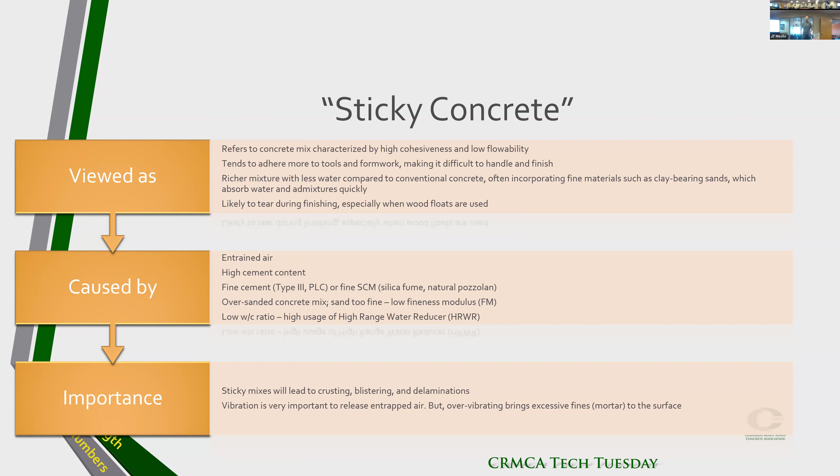Also some of the admixtures you use, I mean I've seen high ranges, if you're using high ranges it'll make it stickier. Especially moving into the 1L world, we're seeing more high range used to get those higher slump mixes, even into SCC mixes. We're seeing these amounts get to the point where it's causing more stickiness. Honestly, I think we had to use AI to give us a better definition of what is sticky concrete. Essentially you're creating more surface area, and more surface area gives you that stickiness. So those water reducers are being used at such high ranges compared to what we're used to, we're gonna start to see more of that with the 1Ls and things like that. So bear that in mind.

I just want to touch on this one too, it's also caused if we have a mix that is high in air, that'll cause that stickiness as well. So if you guys are using a mix regularly and you're like, hey, why is it sticky today?

Hey, can you guys pop an air test on this back at the plant? I think there's something going on, talk to the producers. Because that is very much something that could be happening.

Is it the admixture that's making it sticky? It's not the voids. It's actually quite the opposite - there's more surface area being used, so there's less voids. Without water reducers, you have more connectivity between your trowel and the concrete, so there's more stickiness, more of that mortar.

But how does the high air make it sticky? Is it the admixture for the air? It's not the voids, it's created by the air. It's literally just the percentage of air that's in there is going to end up causing more cohesiveness to your trowel.

It's like foam on top of a beer. Yeah, okay. When you're taking a drink of your beer, you have all that foam stick to your lip - it's going to be the same kind of thing.

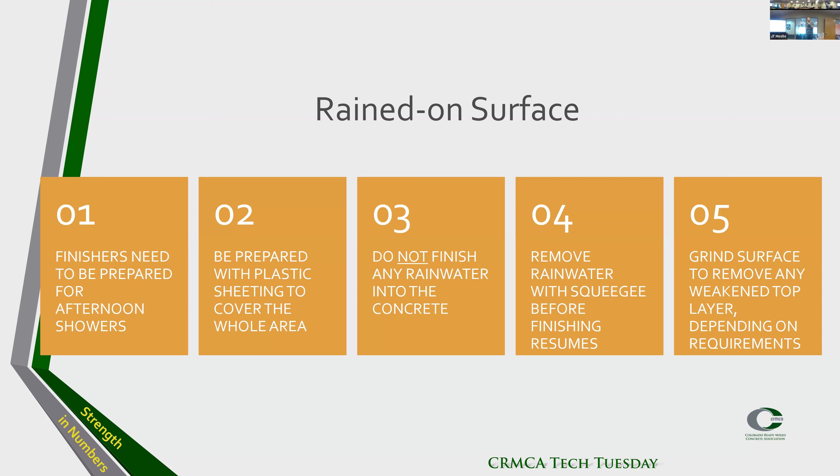Absolutely, the last step. But exposed aggregate would look nice. Yeah, and I'll tell you guys, I've actually seen some homeowners end up with that kind of situation where they have to grind down the top surface, and it gives it kind of a cool look. So just personal experience.

Oh, this is all you. Is it? Oh yeah, you wanted this. Let me see, double check. Well,

We'll talk about random cracking. Plastic shrinkage cracking is one of the big ones I see a lot, especially with the 1L — it's very prone to plastic shrinkage. One of the things I always tell my contractors is to watch the spacing for your joints. Sometimes they do joints weirdly, sometimes they do designs, and it creates these weak spots, and it creates random cracking. Sometimes it could be the surface, the subgrade — there are multiple variables when it comes down to random cracking.

Overloading the slab with heavy equipment also causes issues, especially if it's still early on and not ready for production — 2 or 3 days, if you don't have a high early mix, and you're driving your semis and putting all that equipment in, that would also create random cracks. But it's not so random, because you drove a big semi.

One of the points we talked about while doing this was, everybody talks about all the different kinds of cracks — plastic shrinkage, craze, all these different things — but one of the points JT made was there's really only two types of cracks: plastic shrinkage and random, that's really all there is. So that's just something to bear in mind — all of it is just an umbrella term, a way of saying cracking. It's gonna be random, because if we don't tell the concrete how to crack, where to crack, when to crack, it's gonna tell us where, when, and how it's gonna crack. So it just becomes random at that point — I thought that was a cool point.

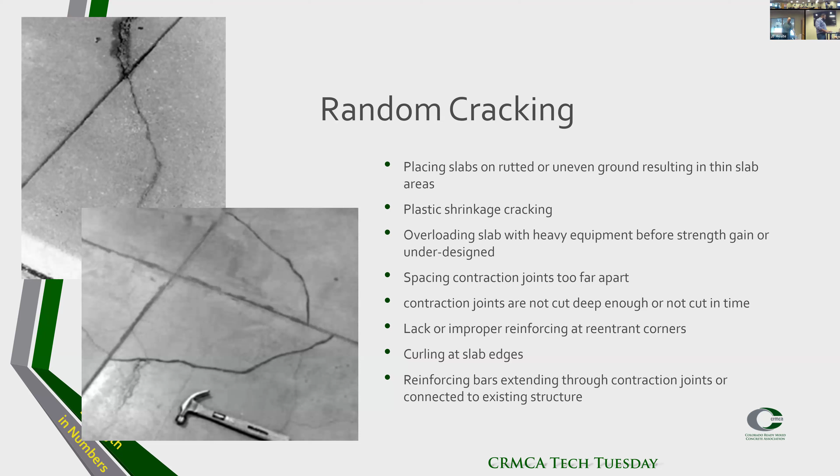Even your curling — when it curls, you've seen it with different temperatures, top versus bottom, and the slabs start to curl. We've seen that in warehouses where it even creates hazards. You're driving a forklift, imagine a slab curled up about this much high — you hit those forks, you're gonna do some damage. So once again, the spacing in between those slabs, the joints, is gonna make a big difference when it comes to that.

Joint spacing is 24 to 36 times the slab thickness, and the proper saw cut depth is 1/4 of the slab thickness. One thing I was unaware of going into this, since I'm not very well versed in flatwork finishing in practice, is how the thickness changes with steel reinforcement. I always knew it as 1/4 of the thickness, but with steel fiber reinforcement you can go as much as 1/3. That's something to bear in mind, especially on big commercial jobs, and to keep an eye out for in the specifications. That's a little point I learned doing this. Yeah, 1/3 of the slab thickness, I did not know that either.

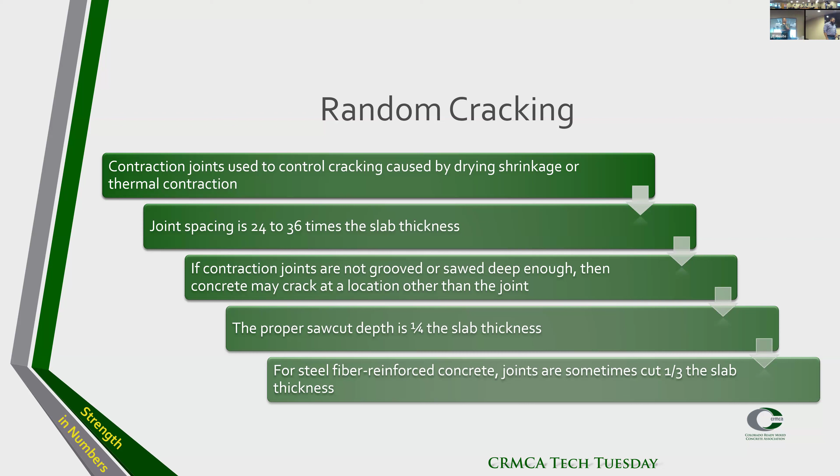At what point does random cracking call for remove and replace? That's a case by case situation, obviously. I think it comes down to, much like the rained-on surface, can we save it without having to do that whole process? Is it structurally sound? If it's structural, what's it doing, what's its placement? I think the definite answer is if it's structurally unsound, that's when you have to rip and replace. Before that point, it kind of depends on the situation. It's almost cosmetic, right? Exactly, you might add some more cracks and give it a nice spidery look, the crocodile look, the rattlesnake. There's a reason we saw cut, there's a reason we create joints, because concrete's going to crack. Just because it cracks does not mean it's bad concrete or less structural. That's something you have to determine depending on the pour. It will harden and it will crack. Those are the two guarantees in concrete.

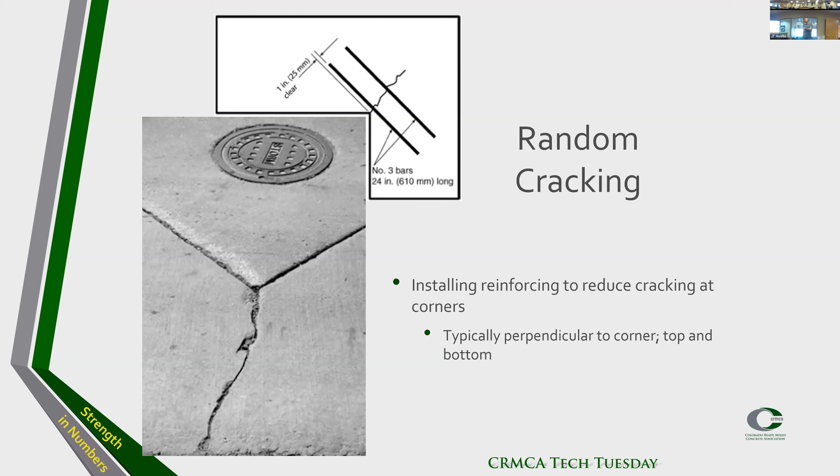There we are, some good pictures of random cracks. I think this is important to know: when you don't just have a clean monolithic slab, you have to account for the jointing properly, not just the depth or spacing but where they go. When you have a joint cut like that, do you need to put that extra cut in coming off the corner? That's important to be aware of, because if we don't tell concrete where, when, and how to crack, it's going to tell us when, where, and how it's going to do it.

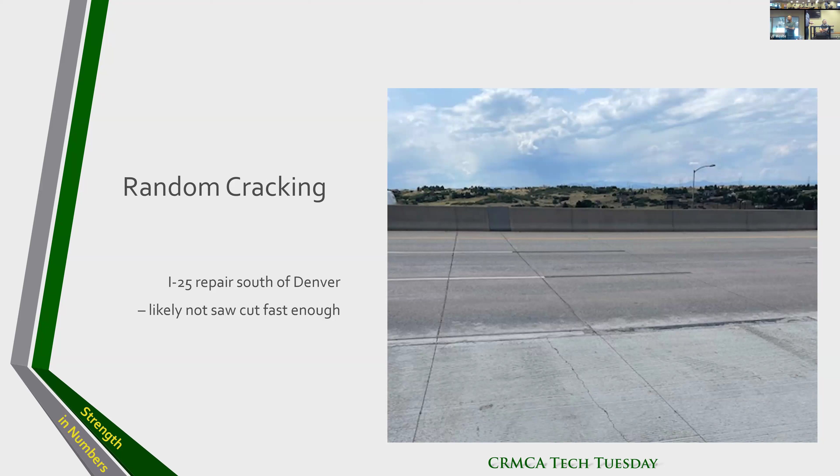Yeah, cracking. Exactly, like you said, if we don't tell it what to do, it'll do it by itself. Random cracking is just that, random and uncontrolled, and if we can control it, the better. Doing those saw cuts at the appropriate time, knowing where to put reinforcing steel at corners, whatever it may be, controlling where those locations are, you're going to see less, if any, random cracking. Well, hell, they're called control joints for a reason, right? So let's control them, I think that's a huge part.

Craze, spiderweb cracking, what we talked about a little, the new term I heard was crocodile. Yeah, that was new to me too. Roll brought that one to me today, I said I've never heard that one before, I've always just known it as either craze or spider cracking. Usually these cracks are surface, at the top. They're aesthetically unpleasing, ugly to look at unless you're into it. But they don't put into question the integrity of the concrete. I'm having a hard time thinking today.

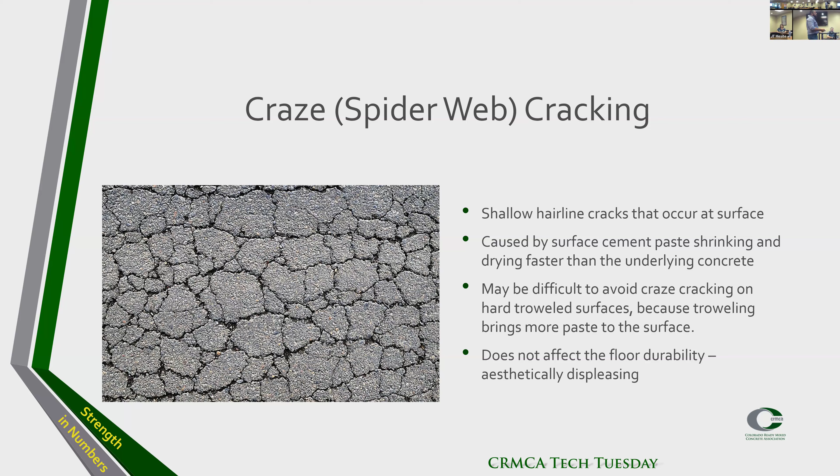Maybe it's difficult to avoid craze cracking on hard trowel surfaces. I think one of the biggest reasons is, if we're not timing ourselves properly with that hard troweling, we may cause some of that bleed water to be trapped in there, and we're going to start to see this happen. Think about a basement pour, if you hard trowel it with a different setting, you'll see this happen. That's why it's more common with hard trowel surfaces. Usually the top layer, you work it, overwork it, dry it, and that's where you get this beautiful pattern.

To minimize craze cracking, do not work that bleed water into it. Let it evaporate and then jump on it. Give it a little bit of time. Our whole presentation usually comes back to: give it time, give it time. It's one of the main points.

I know water is necessary, but it's also kind of the devil when it comes to concrete. It causes the ability to create the second most used product in the world behind water itself. Concrete is hugely used worldwide, but water could also be very destructive to concrete in many different ways. I think that's one of the reasons we do these presentations. It always comes back to water being added, water not being worked in, not blessing the concrete. That's just the fine give and take of concrete. We needed the water for the concrete, we overuse it, and we've destroyed the concrete. It's a fun game to play, a fun balancing act.

Back to the blessing, I've even read stories of guys grabbing their hard hat, grabbing some water, and spreading it all over. Adding extra water to that top is like our number one problem, no matter what contractor we use in the city. We tell them over and over, don't do that, don't do that. But if you don't know what you're doing, all you can think is, this makes it easier for me. A lot of problems on site come from guys thinking, well, this makes it easier for me to do, but they're not thinking down the road, or even right now, what they're doing to it.

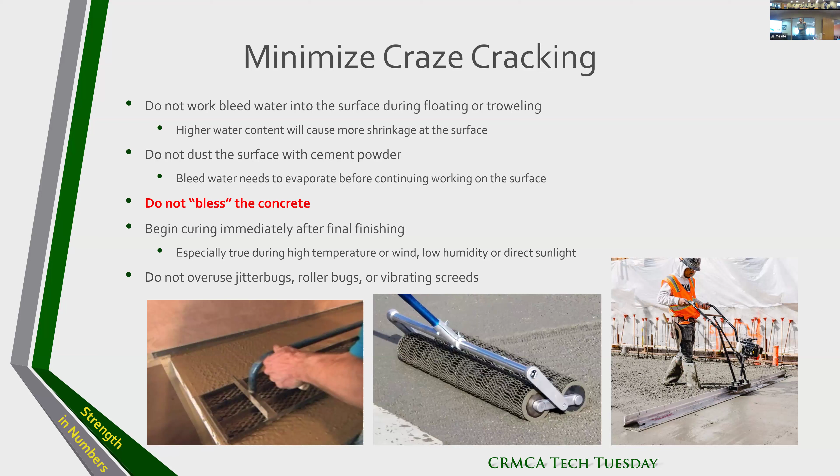It's just something to keep in mind, that they're great tools if we're using them properly. You don't want to use a hammer to try and get a piece of window into the wall. It's not always the best tool, but it's a great tool to have. Just something that should be remembered: yes, it's a great tool, it's not the only tool. So that's my take on jitterbugs and roller bugs.

One of the things we didn't touch on that I wanted to is curing. That's huge, we want to start that as soon as we're done with the final finishing. That's a huge point we almost skipped over. Curing is hugely important. We can give you the best concrete in the world, but if it's not cured properly, it's not gonna come out for crap. We've touched on it a little with things like covering with burlap and plastic, but starting as soon as we're done with finishing is hugely important.

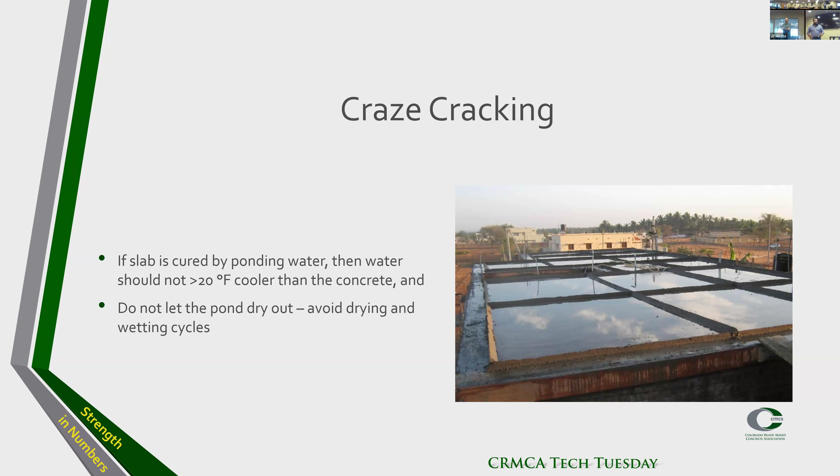This is actually a kind of cool picture for me, we talked about it in our conversation. This is pond curing. I've never actually seen it done in real life, so when I got to witness this I thought, that's kind of neat, a great idea. It's a great way to cure a slab, again if it's done properly. We want to make sure those temperatures don't vary more than 20 degrees. It says cooler, but if we're in Colorado that could change this afternoon, so that's something to think about. The big one is not to let it dry out, because at that point it's not a pond curing situation anymore. Concrete will definitely set underwater though, so that's a pretty good example right there.

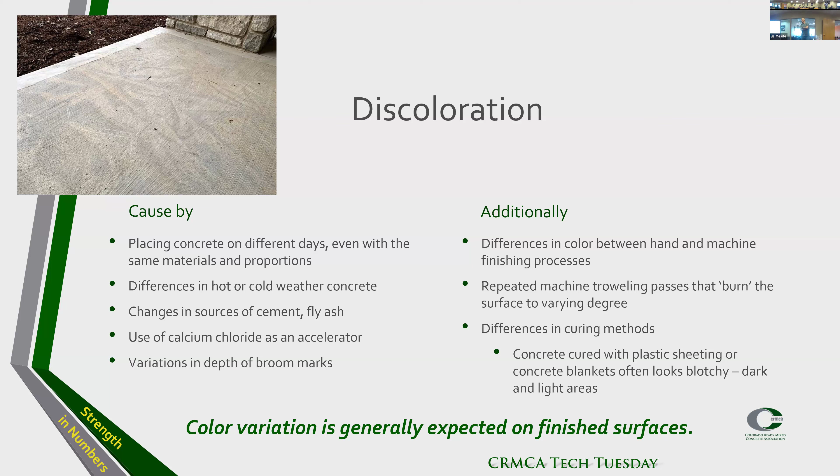This one's dusting. The most common cause of concrete dusting is carbon dioxide in the air. Usually signs of dusting on your flatwork are proof that the surface is weak - that first surface is weak. You should be able to see it just by stepping on it or sweeping it - that white dust that comes up is what we call dusting. It's chalky, and if you walk through your house with your shoes on sometimes, your partner will yell at you - that's all that dusting. For me, this picture is reminiscent of being in grade school, saying a bad word in class, and having to write lines.

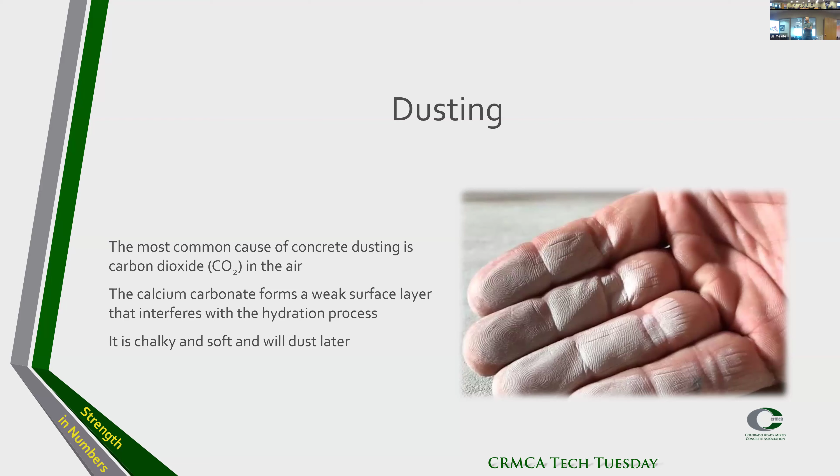I will not say this bad word in class 100 times on the chalkboard. Every time I see this picture, it just kind of brings me back to that.

One of the reasons we wanted to talk about dusting, specifically in the wintertime, is some GCs want to help out and they bring out these heater vents, the salamanders. Kerosene, diesel. What it does is, if you don't have the proper ventilation and you have dusting with those salamanders, it creates what we call CO poisoning.

While we were putting this presentation together, one of our colleagues brought up that he went to a job where they were using these heaters and everybody seemed very lethargic with blotchy skin, just feeling off. They didn't realize that's what was happening because they didn't have the proper ventilation.

So for one, less important, you're more likely to cause dusting. More importantly, you could have somebody get CO poisoning and fall out, even die from it. So it's a huge safety concern as well. Just something to bear in mind.

If you're a GC out there and you want to bring some heat to your guys, make sure windows are open. I know it seems counterintuitive when you have that cold getting in, but let them know it's because we don't want to poison you guys.

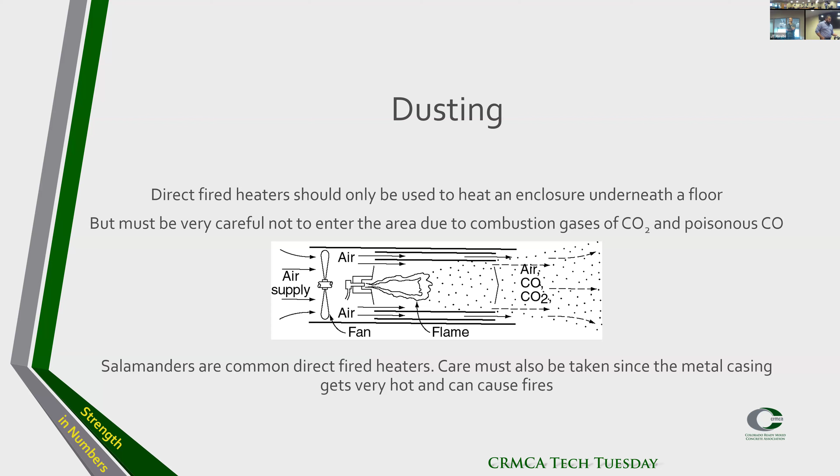One thing I'll mention is I had somebody, a driver, ask me about a job where they had to back into a building that had a pump running inside, and asked if that could cause it. Yeah, you absolutely can - you could see the smog in the air. That could very much cause this issue. So it doesn't just come from the salamander heaters; any kind of CO2 in the air can cause that reaction.

Curling and warping, basically going back to upward or downward edges that tend to curl up or down. It's usually horizontal. We see this a lot in warehouses, where slabs start to curl and create an uneven surface. Say you're driving a forklift and you hit that with the forks, you're going to flip over - it's even a tripping hazard.

This is usually caused by what we call thermal - moisture and temperature in the surface. Usually the subgrade is a different temperature than what's on top, and that's what's creating that upward or downward curl when it comes down to the slab.

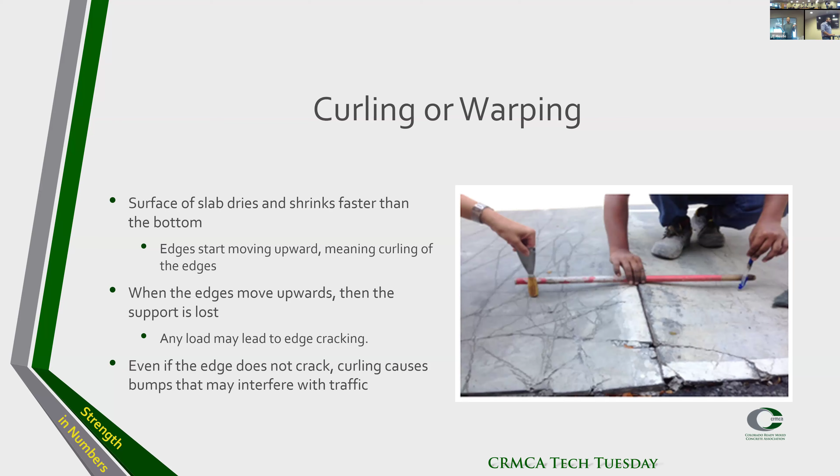I equate this to when you burn a piece of paper - you see it start catching fire in the corners and curl up, because that temperature changes more drastically. This is a great example of what that looks like. You start to get that curling when the temperature between the subgrade and the concrete varies - that can absolutely cause this curling.

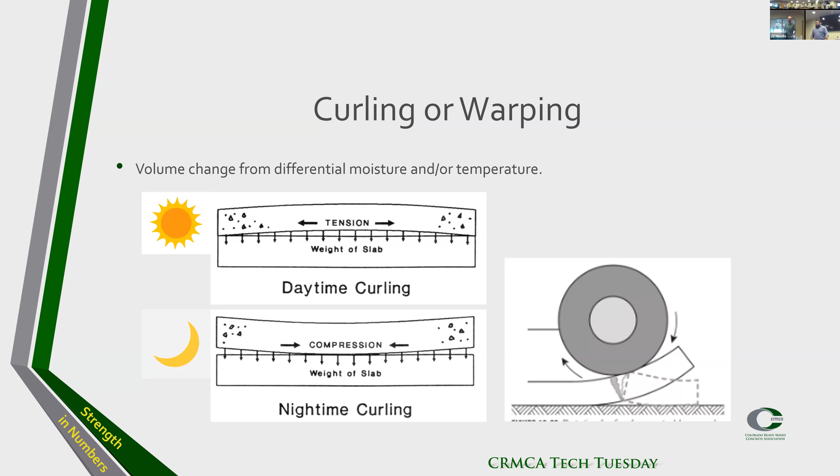And going back to what I said, the spacing of the joints matters. The smaller the spacing, the more curling you're going to see. Bigger slabs have more weight, so that takes care of it. Absolutely.

Scaling, going back to it, looks a lot like delamination. It's basically what we know as the freeze and thaw issue. When those ice crystals get inside the pores of the concrete, they expand and contract. Once they expand, they push out the concrete, creating what we'd call the weak paste.

Weak blisterings will start to degrade over time, and this will keep going. Another cause of scaling is de-icing chloride. Especially in Colorado, they spread it all over the roads. You drive your car back home, and one of the big signs you usually see with scaling is on the driveway, those tire marks going all the way up to where they parked. You can see right where they pulled up. But I've seen someone say it's a bad load of concrete, when really it's from that engine dripping, and it's so hot it melts the ice if you drive on top of snow or ice. Those are some good examples of scaling.

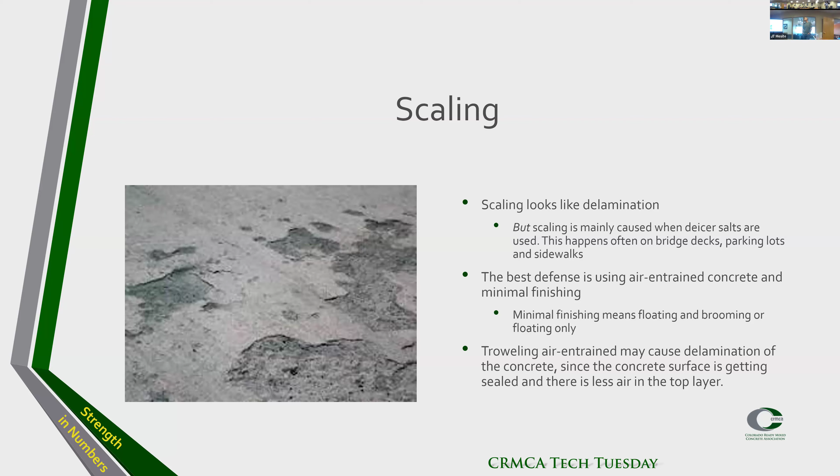One of the points I want to touch on is minimal finishing. When we just hit it with the bull float, or hit it with the float, hit it with the broom, let it do its thing - it knows what it needs. So that's something to think about when we're doing that.

I don't know if you were assigned this one or if I was, to be honest with you. Talk about it - curing, time, temp, and moisture. That's what I'm saying. I feel like this is your wheelhouse, right?

Yeah, basically, without sufficient moisture, hydration will not occur. Without hydration, concrete cannot attain the desired strength. So keep your concrete moistured. Going back to that slide, if it dries, it dies when it comes down to that. If it dries, it dies. I was saying time, temperature, and moisture - that's my favorite sentence now.

Honestly, to this point, if we touched on it a little bit, we can give you a great quality product, but if it's not cured properly, it's for naught. So that's something to bear in mind. One of the things going back to training we're doing with our drivers...

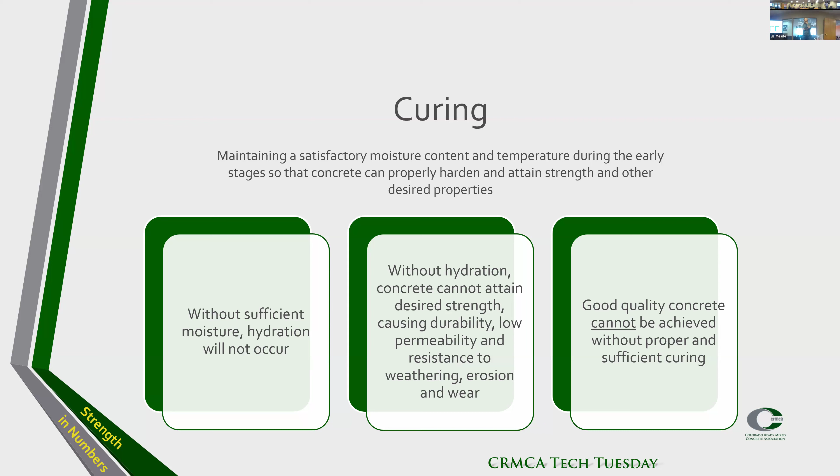...is we showed them what that kind of over water use can do. One of the things we're trying to educate them on is that it's not only going to ruin your strength, it's also going to ruin your permeability. You're going to start allowing more water into the middle of the concrete, and it's just going to start ruining it, because we already know concrete is weakest from a tensile point. So if we're not curing it properly, we're not allowing it to do what it has to do - the hydration process. It doesn't matter what we do to prepare for that job, moving forward it's going to have to be redone. Curing is really, really important.

Consequences of poor curing: more cracking and curling, crazing, alligator map cracking as we call it - I like that one, that's gonna be my new one, the alligator one. Erosion and wearing away from the surface, and definitely the big issue we always look for is low strength. That is something that is not going to hold up. So those are some of the consequences of poor curing.

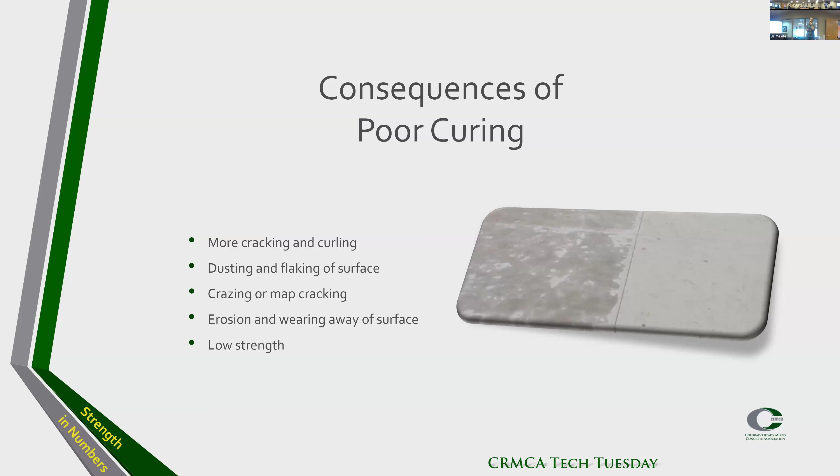Especially if it's a mix designed at 4,500 PSI and it didn't get cured properly, we're not anywhere near that. Makes sense, right? And that's kind of one of the big lessons we've all learned over the years - strength. So if we want to have good strength, we want to make sure we have good curing practices.

We go back to the curing compounds, the finishers. One question was asked: how much should we be adding to finish the concrete being poured? We always tell them, go to the manufacturer of that finishing product, go based on what they're telling you.

They tell you specifically, apply at this time and this much. So always go back depending on what you're using. There's a ton out there, a lot of different options, but these are some great points to use as a rule of thumb. Always want to go back to the manufacturer recommendation.

But we know we want to do a continuous film, get the best coverage we can. So we want to make sure and do it from two different perpendicular angles. As far as, what does 1 gallon of this particular curing compound do? How much does it cover? That's a big part, you want to go back and check your manufacturer recommendations.

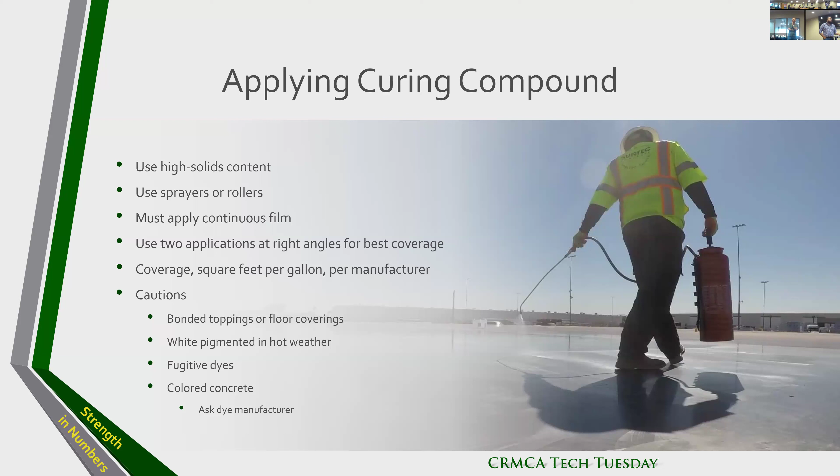Because if they're saying it's 1 gallon to 5 gallons, and you're throwing 5 gallons to 5 gallons, at this point we're just throwing water and money on top. Another big point is we want to make sure we're using it properly if we have colored concrete. Is this going to be good to use on colored concrete, or does it have to be just plain gray concrete? Something to bear in mind, and ask those questions to the manufacturers as well.

Sealing, so curing and sealing are two different things. Sealing is what we recommend after the concrete's been set, after all said and done, to basically extend the life of your concrete. Sealing your exterior concrete is a minimum of 30 days after it's been poured. Some people like to wait a little longer, but based on ACI standards it's 30 days. I also know that the big point is that we want to make sure it's done prior to that first initial freeze.

So that gets a little tricky again in Colorado where we're getting into the winter months. So is it 30 days, or is it before the first freeze? That's actually a point I want to bring up and get your thoughts on, because I feel like that can be kind of butting heads with itself.

What are your thoughts? You need to protect the concrete, that's the bottom line. Be it blankets, coverage, sealing, because the curing process on concrete is not just a 1 hour, 2 hour process. It is a week, 3 weeks, months worth of process. Concrete continues to gain strength over its lifetime. That initial curing can be a few days, it could be a week, it could be a couple weeks.

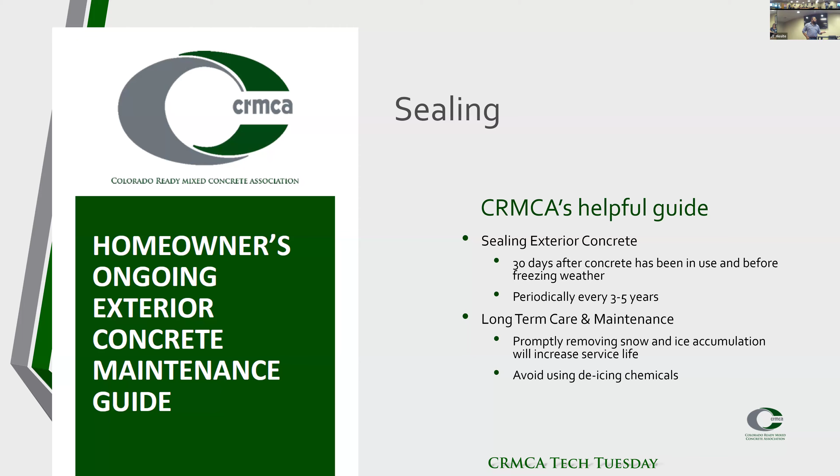So you've got to make sure you're understanding the product that the producers are providing. Bottom line, protect it. This is something the GCs should also be letting the customers know: seal it, and also every 3 to 5 years, reapply that coat. It's going to extend the life of your concrete for years to come. It definitely helps.

Perfect, we survived. These are some great references made available for anybody who has any more questions, or wants to go a little bit more in depth on what some of the things we've talked about.

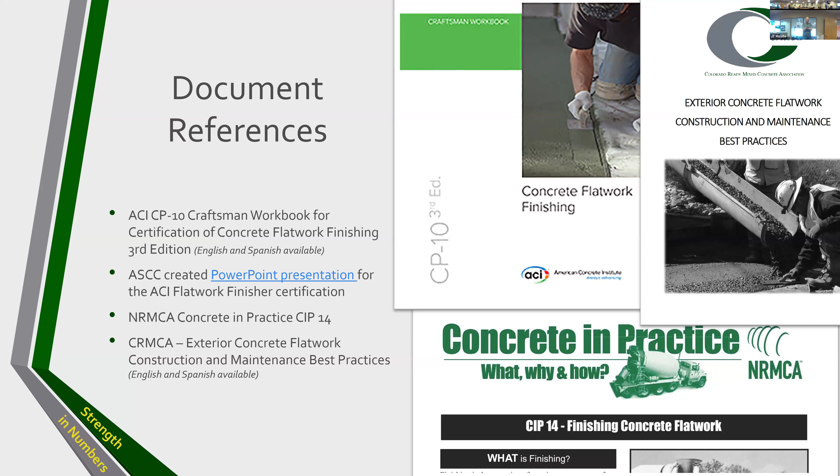I'll tell you guys that for me, I think the concrete in practices, the CIPs, they're generally two pages long, and they have a lot of great information in just those 2 pages. That's one thing we talk about, we still go back to them ourselves. They're a little older, but they still work. The information today still holds up.

It's a great way to get that basic information, like, why did this happen, how do I prevent this particular thing? Something to bear in mind, I know I have them readily available for my customers if they ask, so I'm sure most of your producers do as well. If you guys have questions on those sorts of things, don't be afraid to ask. For me, the CIPs are a huge help. CRMCA has a handful of them as well.

So to summarize, minimizing the defects: don't add too much water to the mix, don't finish the bleed water into the mix or work it in there, and do protect it from the rain, snowstorms, and all that good stuff. Don't bless the concrete, we say - don't add that water to the top, it's not gonna do anything good. Just remember, we're not in church, we don't bless the concrete, right? That's not for us.

Another big one that I feel like we could have made stand out a little more is the curing - make sure we're curing that properly, because that's gonna give us a nicer product for a lot longer if we're doing that properly. And then, of course, we want to make sure we're not putting it into use before it's ready. If we need something that needs to be in use early on, again, communication is key. Talk to your producers, let them know, hey, we need this in use 24 to 48 hours, great, we can do that. Don't just use any old 'I've used this before, it'll be fine' - it's asking for problems. Allow it to gain strength.